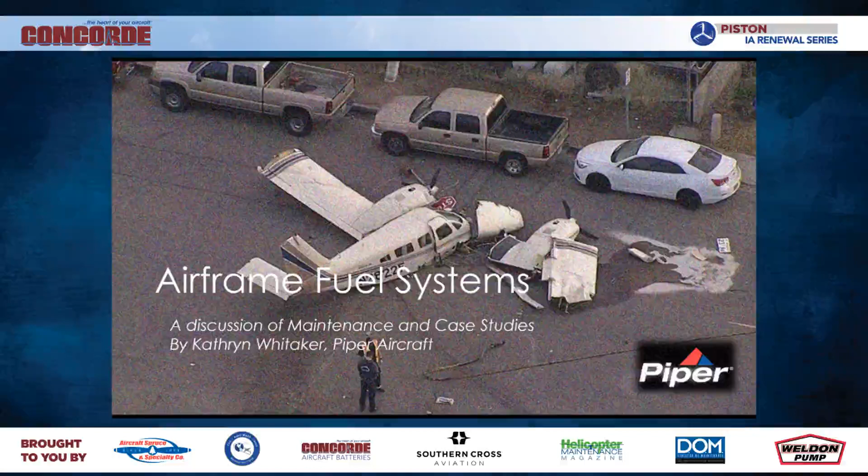So, if you don't remember me from last year, I am an aircraft accident investigator. My official title is Air Safety Investigator. And that basically means that I work for Piper Aircraft, assisting the NTSB in doing aircraft accident investigations, usually within the United States, but we also travel globally on occasion.

And today I would like to talk to you about aircraft fuel systems, which has been a recurring hot button issue within the accident investigation community for some time now. And recently there have been some accidents that have been more high profile lately involving these types of failures, aircraft mechanical failures. So I would like to talk to you a little bit about this, and I'm going to be referencing some case studies. I was told this was popular last year, so you'll be happy to hear that I'm going to be doing more of these today. So without further ado, let's get on into it.

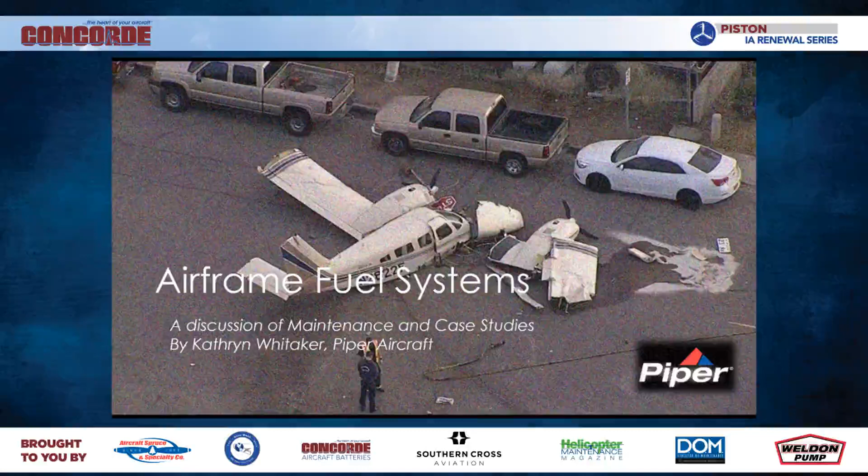So just to touch on some statistics from AOPA's Nall Report, in 2020 alone, which is the most recent year that they have done a more detailed publication of the information on, there were 153 general aviation or small aircraft accidents that were caused by mechanical problems, which was about 17% of overall accidents, and 26 of these maintenance-related accidents were problems with the fuel systems.

Another 58 accidents were related to fuel management, which usually relates to the pilot perhaps not bringing enough fuel on board, overdoing the endurance of their aircraft, maybe not switching tanks when they were supposed to.

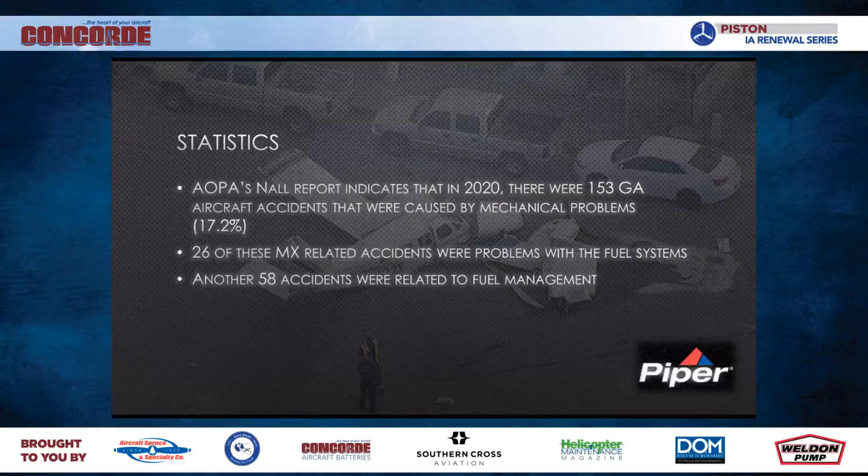Fuel system failures tend to fall under kind of 4 different categories. And some of these, or all of these, could be happening all at once within a failure. They include things like fuel flow interruption, loss of fuel where it's leaking, it's leaving the aircraft, contamination, where there's something in the fuel that does not belong, typically water or other things. We also can have fuel quantity indication errors, and we'll be talking about all 4 of these things today.

Each of these can result in engine power loss, and leakage can also cause fires. So we have many different hazards to flight when these things happen. These problems can occur together, or they can cause one another.

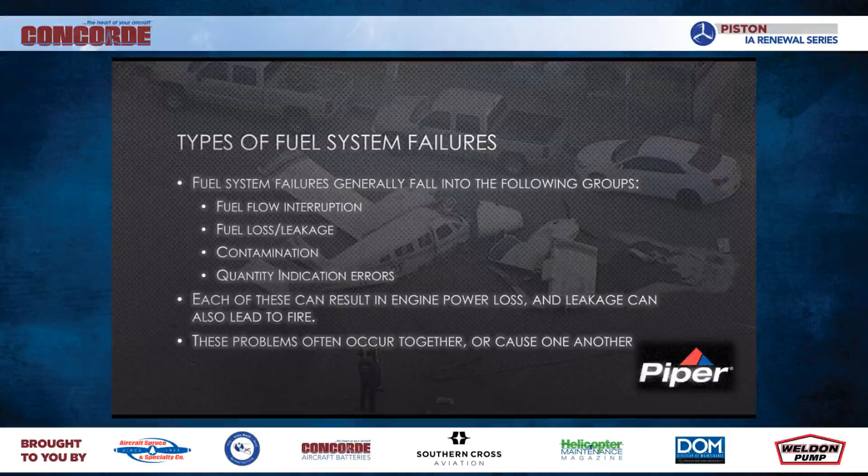So usually when you think of a fuel system failure, you're going to think of fuel starvation, which is lack of fuel getting to the engine or engines, fuel flow interruptions, things like that. And maintenance-related fuel flow interruptions can come from multiple sources. So you can have improper material usage. You can use the wrong sealant, sloshes. Fuel filters can be inappropriate. You can be installing the wrong gaskets in the fuel system.

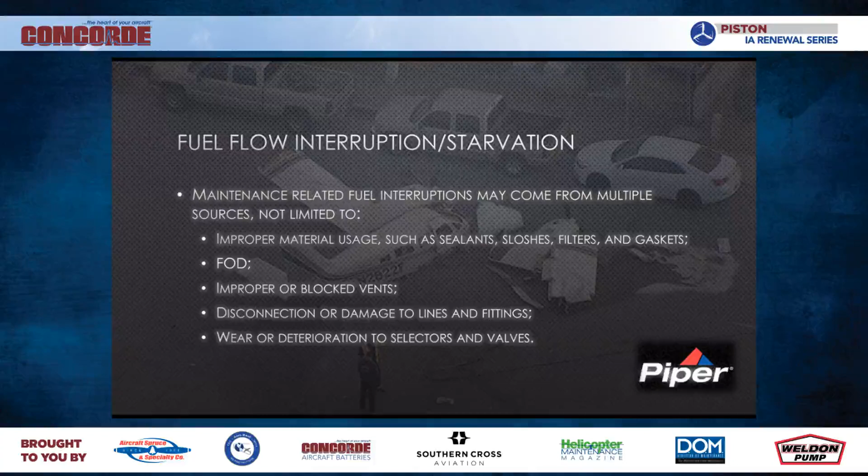You can have foreign objects, including things like water, that are entering the fuel system. The blockage of vents can cause interruption to fuel flow. Disconnection or damage to lines and fittings. And you can also have wear or deterioration of the selectors and valves. And all these things could be occurring on one aircraft if it's in kind of a troubled mechanical state. So be alert to these things.

We have a classic example right here. This was actually one of the very first accidents I ever investigated. This is a Cherokee 6. It had a mishap in 2018 in Reno, Nevada. And as you can see here, we've got a disconnected fuel line. This, I believe, was the fuel line that was going from the outlet of the mechanical fuel pump, the engine-driven fuel pump, to the fuel servo or the carburetor. I don't remember if it had a servo. It looks like a servo there.

This aircraft was undergoing maintenance at the time. This was somewhat of a frustrating case, and I'm sure many of you mechanics here will be very annoyed with this story that I'm about to tell you. But this aircraft was undergoing maintenance. Specifically, it was receiving a suite of engine data monitoring equipment, including a fuel flow sensor, feeding into an engine data monitor that was being installed on the instrument panel, which are great systems.

I honestly advocate for these to pilots more than any other instrument that you can get if you're flying VFR, especially. They do a great job of giving the pilot a much better understanding of what their airplane is doing, assuming that the mechanic is allowed to actually install this system correctly. In this case, the mechanic working on this aircraft was only partway through the installation of this system, and he was interrupted. He needed to get a torque wrench or some other type of wrench, and so he installed this fitting finger tight and left the engine cowling off.

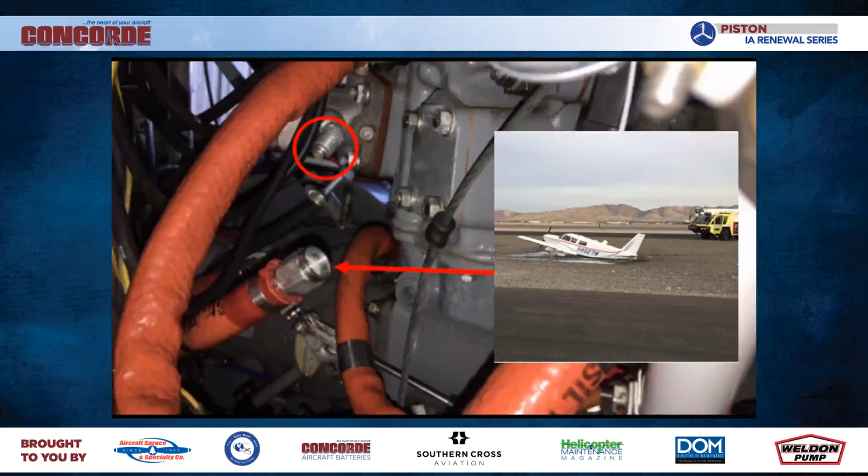Rolling on into another case study here, we have an accident that occurred about 9 years ago to a Van's RV-10, which is a pretty cool kit-built airplane, and the kit went out to its owner in 2009. And this dude hustled. He got this thing done in less than a year, and I'm told this is quite an intensive build for an aircraft. It usually takes more than a year. It usually is one of those things where it's like terminally in the process of being built. But this gentleman was able to chip away at it and complete this airplane in about a year.

During the initial climb on the day of the accident, the engine failed. The airplane was not able to return to the airport, and he performed a forced landing. He did not have many good opportunities to find a suitable landing site for this forced landing, and unfortunately he put it down in kind of like a paper mill yard with a bunch of equipment in it. He was fatally injured. One of his passengers survived, but he also had another fatally injured passenger.

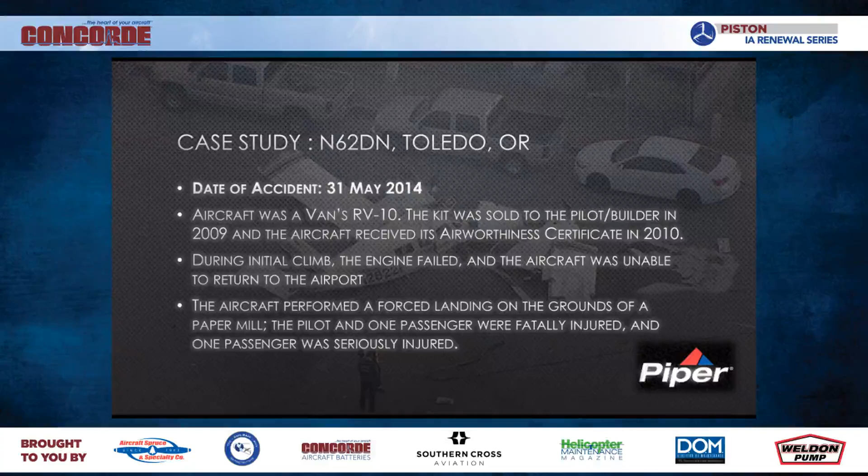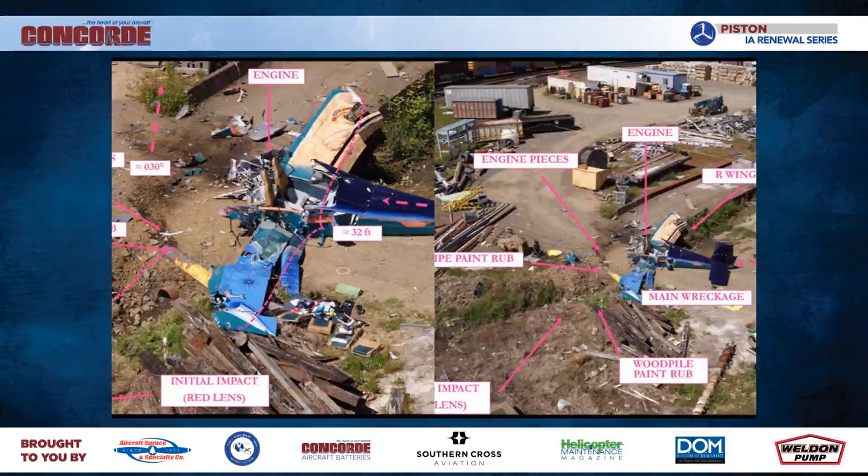So you can see here, the aircraft came to rest in this yard, and he really didn't have any opportunities to find a good, suitable landing site for it. It was very unfortunate. I was not a participant in this accident investigation, but when the NTSB investigator did the examination of this airplane, she found RTV lodged within the fuel system of this aircraft.

He'd put it on about 2 to 3 weeks before the accident, and a witness came forward later and said that he had seen the pilot/builder using RTV as a thread sealant and told them to cut it out. This is not an appropriate thread sealant. The build manual for the aircraft stated that fuel lube or an equivalent should be used on these threads. And I shouldn't need to tell anyone this, but RTV is not an equivalent to fuel lube. It should only be used when it is specifically called out for that purpose, and this is not one of those times.

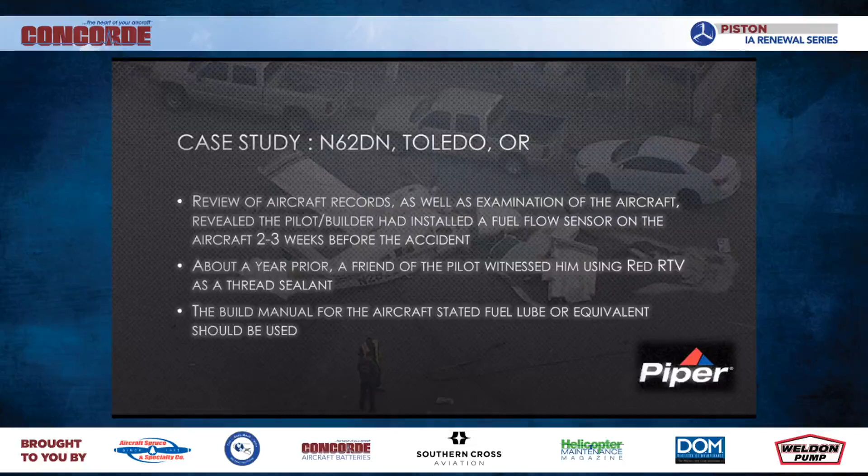So rolling on into another case study here. I didn't investigate this one, but it was really interesting. I kind of wish I'd been there for this one. So today we are talking about the Piper Aztec, which is a pretty cool airplane. I really like them. They are a somewhat larger twin-engine aircraft, really well prized for their useful load. They can carry about anything. They've got kind of a nickname that is probably too crude for this broadcast, so I won't say it, that talks about their load-carrying ability.

But this aircraft was being used as a training aircraft for pilots seeking to get ratings in multi-engine aircraft. And for about a week up until this accident, it had been having some issues. The pilots had said that on the left engine, when you had it selected to the left wing main fuel tank, it had multiple tanks in each wing, it would kind of run rough sometimes. It was really weird. It would run rough. Sometimes the engine would like stumble. Sometimes it would lose engine power and then come right back. It was presenting very odd kind of indications going into this.

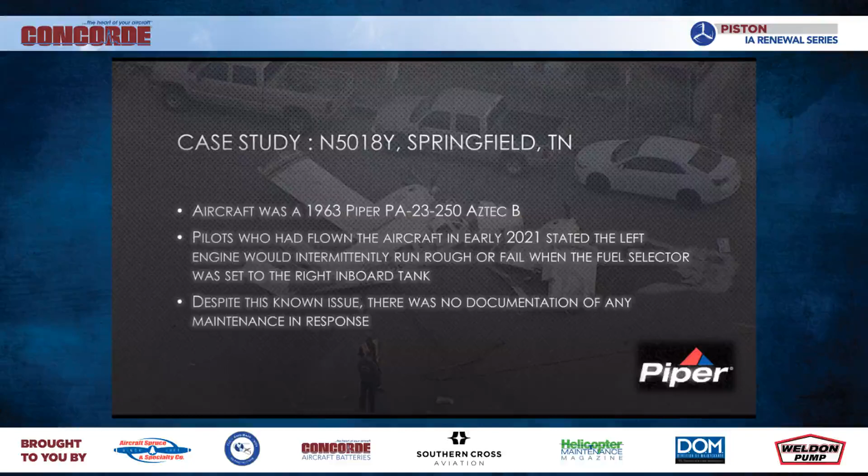It's not understood if they just didn't tell the maintenance group at their flight school about this, or if they were told and it just went over their heads. It's not really known, but there's no documentation in retrospect of any of this being addressed by maintenance, any inspection or repairs done to the airplane.

So on the date of the accident, this airplane was departing its home airport in Springfield, Tennessee, and it had a very sluggish takeoff roll. Immediately after it took off, the left engine failed completely and the propeller could not be feathered. They were unable to continue flight, and it crashed into trees beyond the runway. Both pilots were injured, but they were able to walk away from the aircraft.

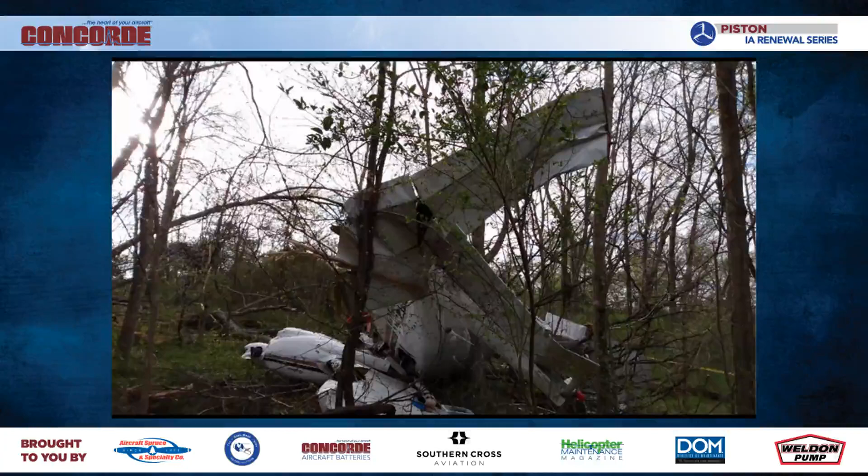They were very lucky to walk away from this aircraft. This thing was pretty trashed, very badly damaged. Both wings broke off, as you can see here. The cabin came to rest inverted, and they're very lucky the cabin didn't collapse and they didn't receive head injuries from landing inverted in this stand of trees here. Very, very lucky indeed.

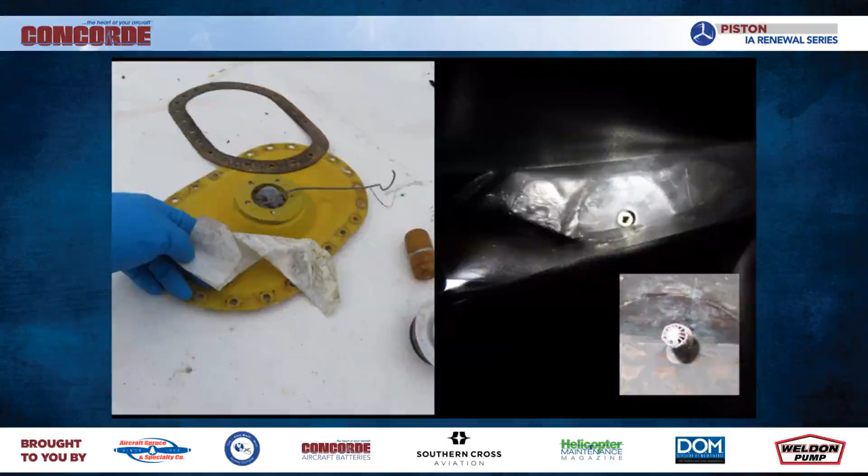So get this. This is what the investigators found in this left main fuel tank. In the picture to the left, we've got duct tape that was found floating within the fuel bladder of this aircraft. It looks like it had been there quite a while, because the fuel had eaten away the silver part of the duct tape and the adhesive. So it was this ribbon free floating within the fuel in this tank for quite some time.

Not only that, if you look to the picture on the right, that is the fuel outlet, where the fuel goes to the fuel lines, the pumps and the selectors, to go to the engine. And it was missing a fuel screen. The inset on the right shows what the fuel screen should look like. It's called a finger screen. It is there to prevent FOD in the tank from entering the line, and also give a larger surface area, so if something is trying to block that outlet, it takes more surface area to properly block it.

When the tank had last been installed, that finger screen did not get installed with it as it should have. Looking at the tank material, it actually looks pretty good. It looks supple. You don't have a lot of the dryness, the crackiness, the distress that you see on an older tank. So the tank itself was in good shape, but it was missing that fuel screen, and there was tape in it.

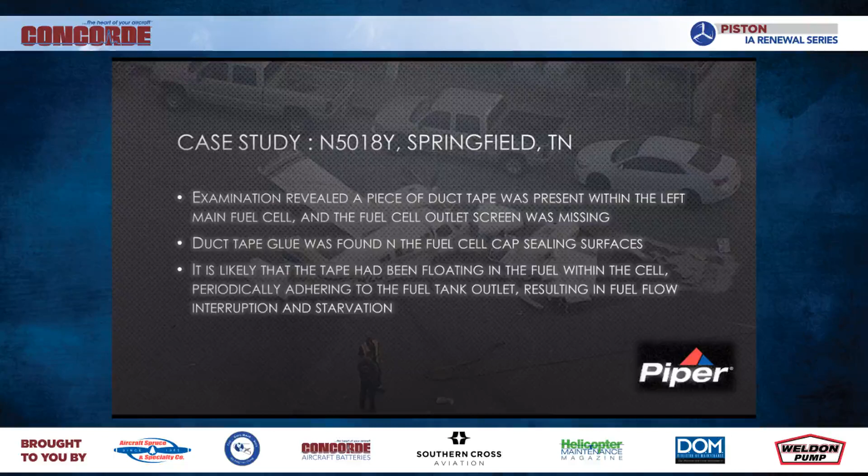Probable cause was considered to be the flight instructor's failure to abort the takeoff, because it did have a sluggish takeoff roll. He should have seen that there was a mechanical problem with the airplane and aborted the takeoff. But also causal was the inadequate maintenance of the left fuel cap by unknown maintenance personnel. They taped up the cap when they should have just replaced it or done whatever the maintenance manual says is appropriate, which resulted in a blockage of the fuel supply from the left wing tank.

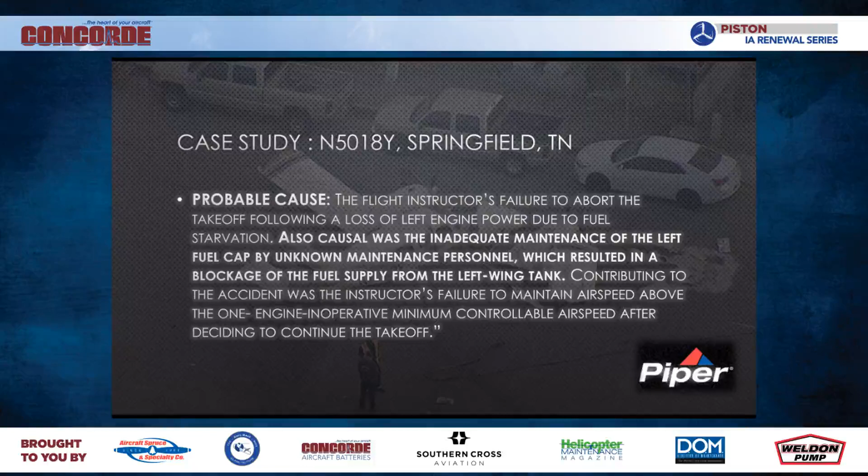Fuel flow interruptions can be caused by FOD, the tape, can be caused by wear or damage to fuel selectors or improper installation of components like that fuel screen. You should always look at the aircraft service or maintenance manual when performing maintenance. You've got to follow that. You can't be creative and come up with your own solutions for how to put things together, especially when they involve RTV and duct tape.

Nothing ever at any time should be fixed by duct tape on an airplane.

I mean, notwithstanding that airplane that got taped up after it got ripped up by bears in Alaska. If you haven't heard that one, Google it. You're sure to be entertained by it.

When inspecting fuel selectors, be alert to symptoms such as binding, roughness, or any changes to operation. I tell this to pilots very frequently, and it should be, in my opinion, a rule of thumb of any interaction with an airplane. If you are interacting with an airplane for a period of time, you become familiar with it, and the behavior of the airplane suddenly changes, that should always be a red flag.

Airplanes do not have moods. Either they are mechanically in good condition and they are doing as they are supposed to, or they are not. And any changes to their behavior or their operation should always be investigated.

Things should not change. So if you have an airplane that you have been maintaining or flying or interacting with on some basis, and suddenly it is doing something different than the last time you interacted with it, you should always look and see what is causing that difference. Could be something innocent like the pilot had another mechanic install something or change something on it, or it could be something bad happening.

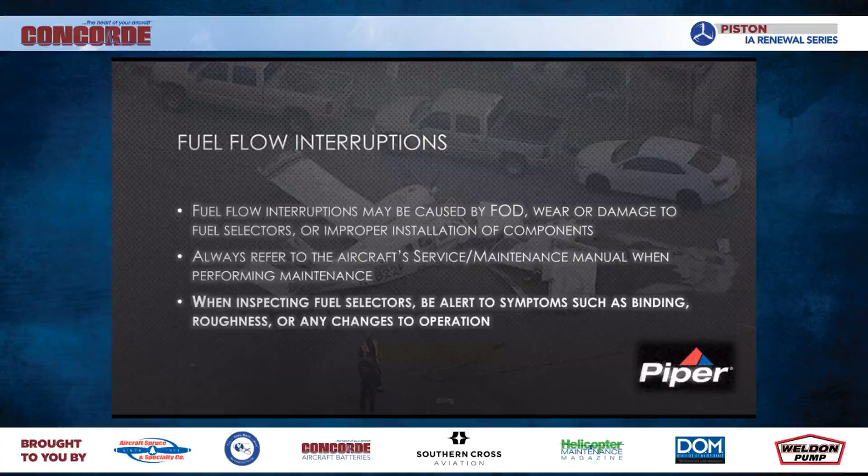But on this particular aircraft, the fuel selector was worn enough that it lacked a tactile detent, so that the pilot could not feel when he switched the fuel setting, if he was actually in the off or the left or the right tank selection.

So fuel selectors should always have a tactile detent, meaning that when you turn it to on, both, off, left, right, whatever selections this fuel tank selector has, you should feel a click or feel a detent. If they do not have that, that's probably meaning that the fuel selector has worn and is past its useful life.

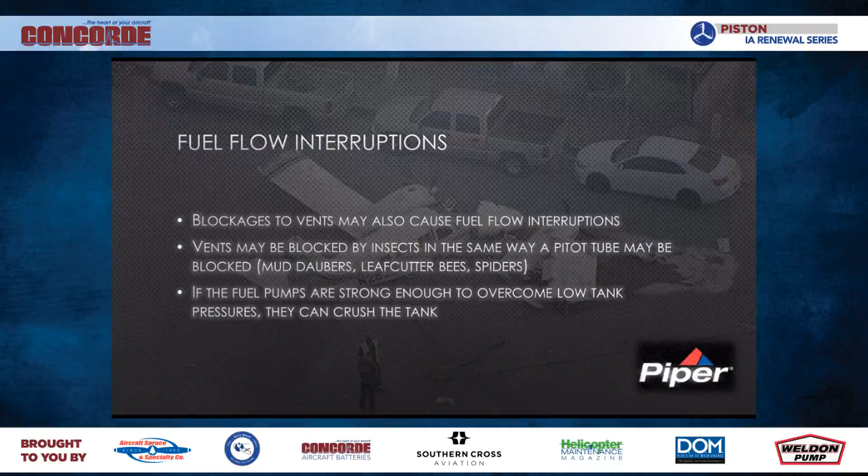If you wanted to visualize what I'm talking about here, if you take a bottle of water and you drink the water out of it without letting any air in, it's going to crunch down the water bottle. Tanks are not really meant to take a lot of positive or negative pressure, and by a lot I mean anything more than a PSI can probably start to do damage.

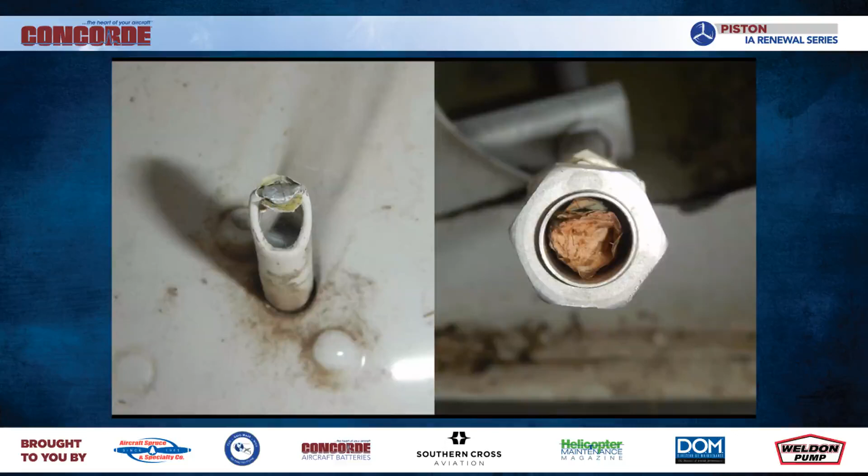We have vents here on a PA-28. This is one that I investigated a couple of years ago, and I don't believe was present at the time of the accident. This happened in the months that the airplane sat at a storage facility awaiting examination. But on the left, we have a tank vent that had a spider living in it.

Gross. And on the right, we have the fuel line that usually goes from the wing to attaching to the fuselage here, and a wasp or something stuffed this thing like 3 inches deep with leaves. So this can happen in a very short amount of time. Insect activity, they like to plug things up. I don't understand that obsession, but they will do it.

So much in the same way that a pitot tube can be blocked by insects, you could have vents or tubes exposed that are left open that can be blocked as well. And so be alert to that. I like to use clear plastic tubing to test fuel lines and vents for blockages. It's very cheap. You can get it at Ace Hardware.

I advise looking for the 3/8-inch diameter tubing because you can use it to blow air through these lines to see if they're blocked or not. They should be able to pass air through very easily. And if you have the fuel system open for any reason during maintenance, it's a good idea to get dust caps or cover the open ends that are exposed to the outside, because bugs will find them.

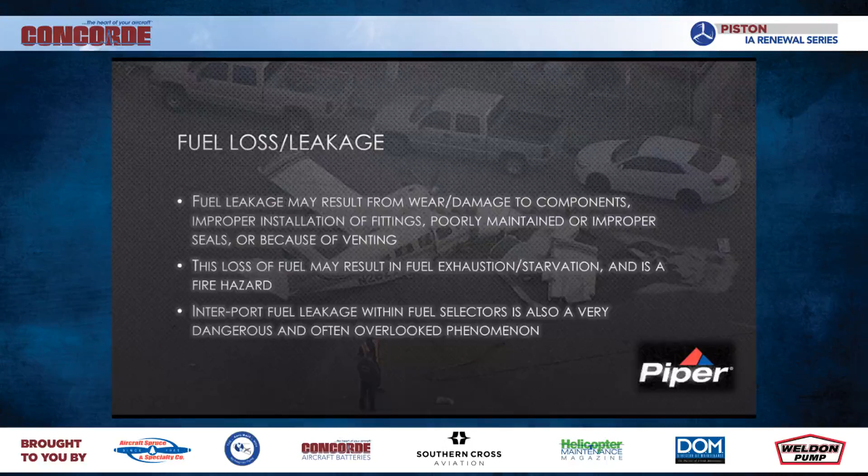We have here a Piper Chieftain that was on its takeoff roll. This is crazy. He was on his takeoff roll, and he started having engine issues. I think he noticed that he was having lower MAP on one engine than the right, so he aborted his takeoff, thankfully. And as he was slowing to a stop, his right wing exploded.

Turns out what had happened was he had a rubber fuel cell, much like the one that was seen in that Aztec, fuel bladder, whatever you want to call it, and it had gotten dry rotted, and there was a kind of a nipple that was a part of the fuel venting system that had broken off because it had just become so dry, very dry, very brittle. And so this started dribbling, leaking fuel and allowing vapors to enter the wing.

And meanwhile, we had a wingtip light wire that had been chafing on a wing rib, and it had been sparking. So you had kind of this nightmare scenario where you had leaking fuel that was trapped within the wing with these sparks that were potentially flying. And so this is the result right here. It's very fortunate that he aborted the takeoff and he just happened to have some kind of engine issue, and did not try to take flight with this, because I do not think that the result would have been very good at all, honestly.

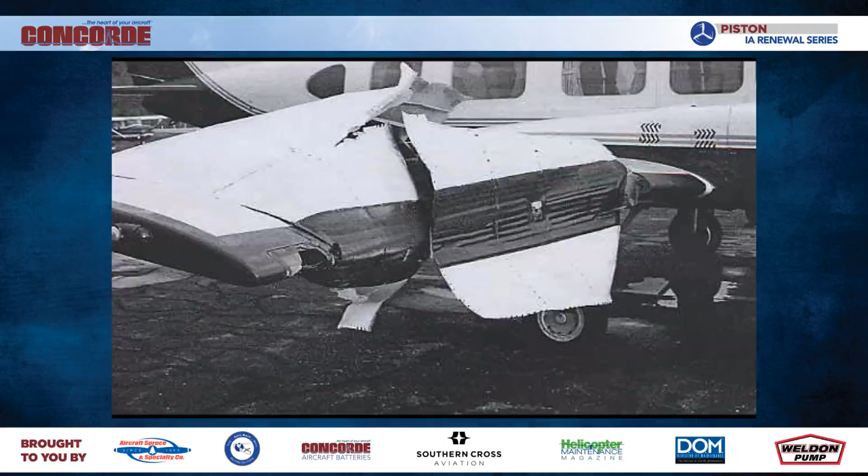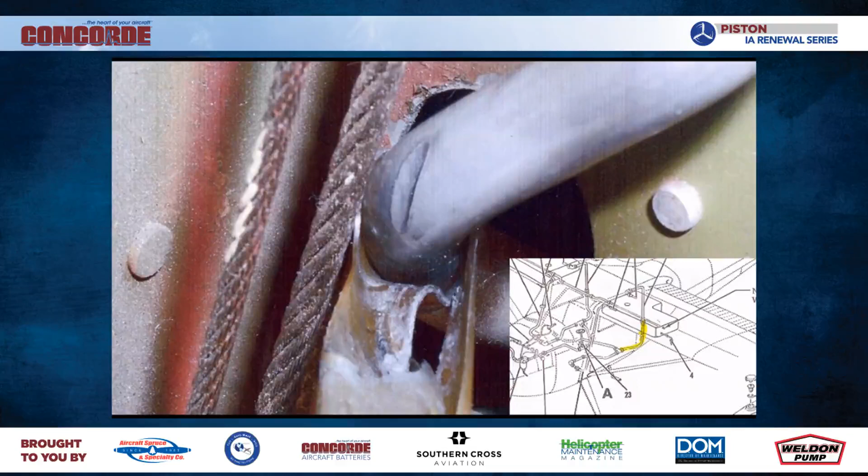Now, this gentleman who found this line here deserves some commendation, because this was in a very difficult area to see, kind of behind the door, the left cabin door of this Cessna 180. And we have two major issues here. We have an aileron cable that is wearing against something, and they really should not be touching anything other than fairleads or pulleys. We have this thing sawing, garroting into the fuel line coming from the left-hand fuel tank.

And this cable succeeded in getting, looks like, a good ways through the material of this fuel line here. And it would have been a disaster had this sawed all the way through, because you have all of that fuel, and I don't remember what the capacity of each tank is in the 180 Jag, but we have all of the weight and the pressure behind this, all of the fuel that is in the left-hand tank that is now bearing down on a hole that's in this line here.

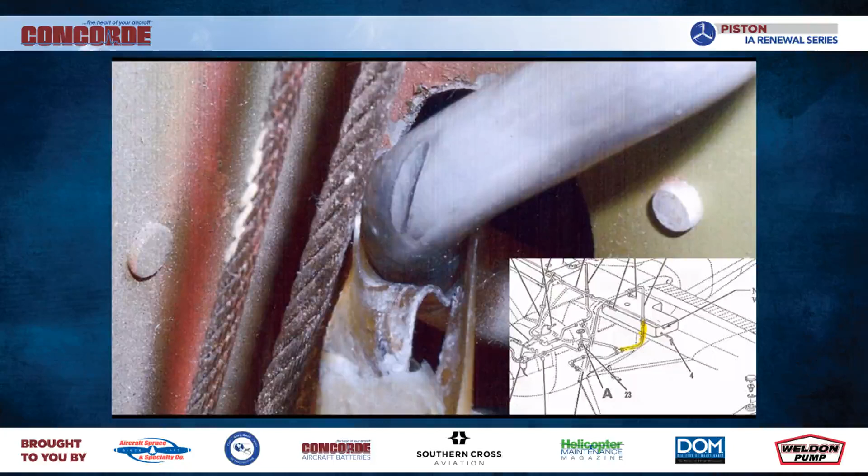So I imagine that had this airplane been in flight, it immediately would have been spraying just like a fire hose into the aft door post here. So it would have been an incredibly dire situation had this happened in flight. But this person did a very good job finding this and being able to photograph it. I guess he had to do some kind of razzle dazzle with a cell phone or a borescope to photograph this.

So this is a recent accident that I participated in the investigation of, and it is in the preliminary report stages of the investigation. So I cannot talk too much about it, other than to provide you what was stated in the preliminary report of this investigation. This was an aircraft. It was a twin Comanche that was flying in the Dallas area, north of Dallas.

This aircraft looked like it had been in very good repair for quite some time under the care of its pilot owner, and it looked like he was very willing to invest in the care of this aircraft. It was clean, it was tidy, it had very good maintenance records, and it was hangared. He babied the aircraft, he liked it very much, but he didn't fly it for a little bit, and he decided to take a kind of a $100 hamburger / buying fuel at another cheaper airport flight. And during that time, he had either a partial or total power loss to both engines. We are still determining that.

And when this aircraft was taken from the accident scene to a wreckage yard in the Dallas area, and we looked at it, I decided to at first sump the fuel from the two fuel selectors that are on the belly of the aircraft. On this type of aircraft, the only fuel sumps on it for each side are in the fuel selectors, which are in the belly of the aircraft. You don't have tank drains for each tank like many aircraft do.

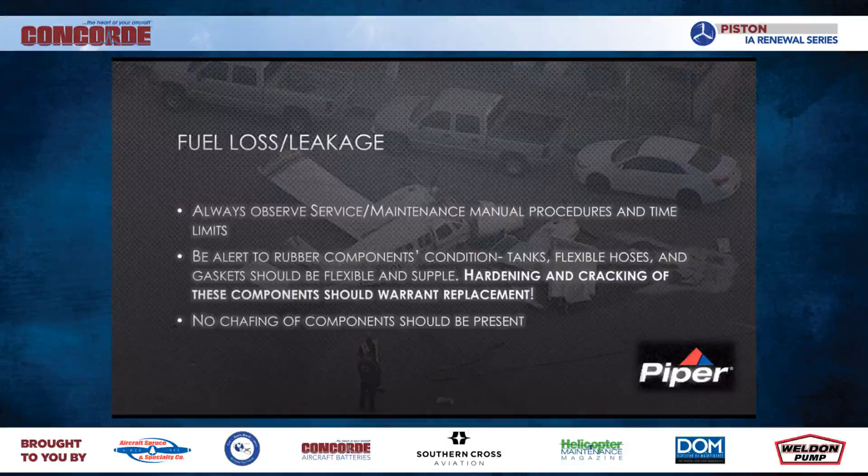Fuel contamination happens unfortunately very frequently, and usually the most frequent contaminant that you're going to see is water, like I mentioned in the slide with that Twin Comanche. Even hangared aircraft can have water enter their fuel systems through condensation. Fuel cap gaskets can deteriorate and allow in rain if the airplane gets rained on outside. And again, going back to our Aztec accident, taping up the gaskets with duct tape is not an appropriate way to remedy a fuel cap that is leaking.

Water can cause rust and another contaminant. So not only is water itself a contaminant, it breeds other contaminants. It never gets better, it only gets worse. And so you can also have other contaminants such as sealant, RTV that we mentioned earlier. You can have other FOD. You can have fuel tank sloshes or sealants.

Sloshes are specifically forbidden in a lot of different aircraft types. I don't believe any of the Piper products are allowed to have sloshes in their tanks. And for those who are unfamiliar with what sloshes are, it's where you can seal a tank by pouring in the sealant and then sloshing it around in the tank, and it covers up any defects that are on the interior of the tank. It sounds really sketchy to me.

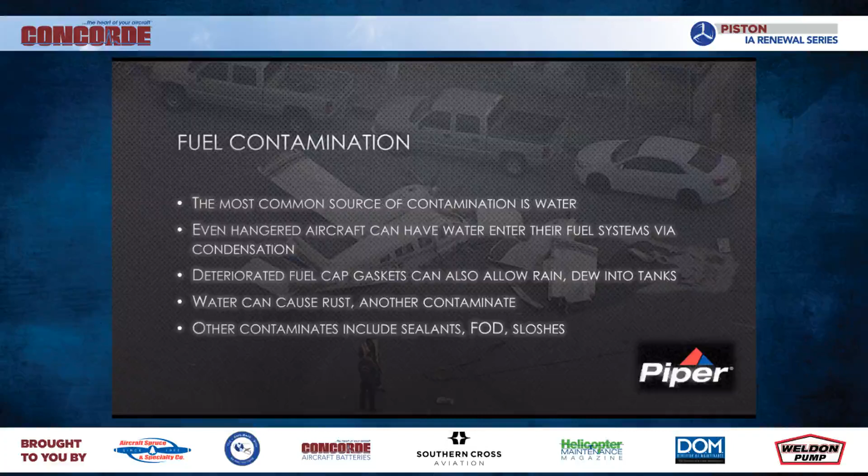Rust doesn't occur unless damage has occurred. So if you start seeing rust, you should be taking it beyond just a draining of the tanks and getting the water out. It should start being one of those things where you start really examining the fuel system in this aircraft, because you cannot trust rust. It means something bad is happening. It's never good. Never, ever good.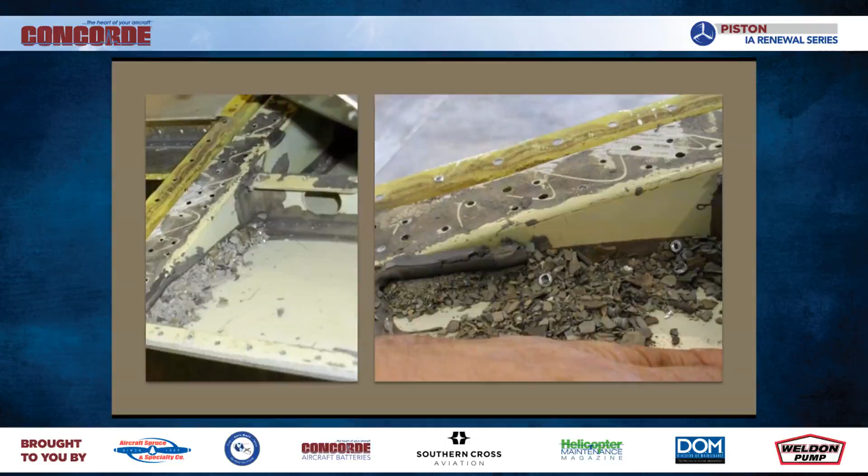I've in the field seen many fuel tanks and other places that were just chock full of bucktails and rivet heads that have been removed at some point and not vacuumed out, and they can be very problematic. So not only do we have this sealant that is flaking, cracking, breaking, we've got rivet heads here too, and I'm sure this person vacuumed them up, but this is visually a good example of how a lot of these little rivet heads and bucktails can enter fuel systems too.

This was another recent accident that, since it's a Cessna, I did not participate in the investigation of, but we have here a Cessna 150 that crashed on September the 6th, and it was a fatal accident that took actually a friend of a friend. One of my friends worked with this gentleman. He was a corporate pilot at the time, if I remember right. And that pilot's son was with him, and they both perished in this accident that happened shortly after takeoff. The engine failed. And if you were to review the preliminary report on the NTSB's website for this accident, you will see the following pictures, which is this hideousness.

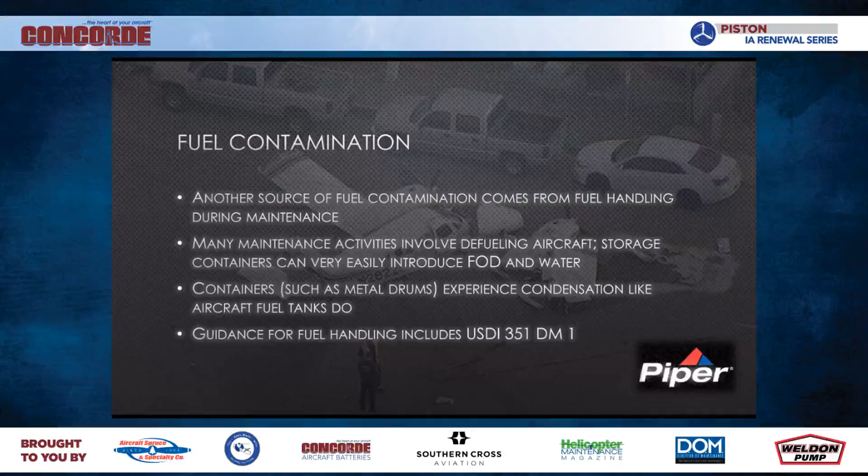Quantity indication errors. So this is kind of a big one. Although pilots are required to calculate the fuel consumption for every flight, inaccurate fuel gauges can cause accidents because pilots can see this fuel gauge showing an incorrect level and kind of doubt their own calculations that they made beforehand. They can cause misfueling as well.

They take on less fuel than they anticipated or more, which can cause weight and balance issues. So if you have gauges that are indicating less fuel than is actually on board, the weight of the aircraft and the balance of the aircraft can be different than the pilot had calculated.

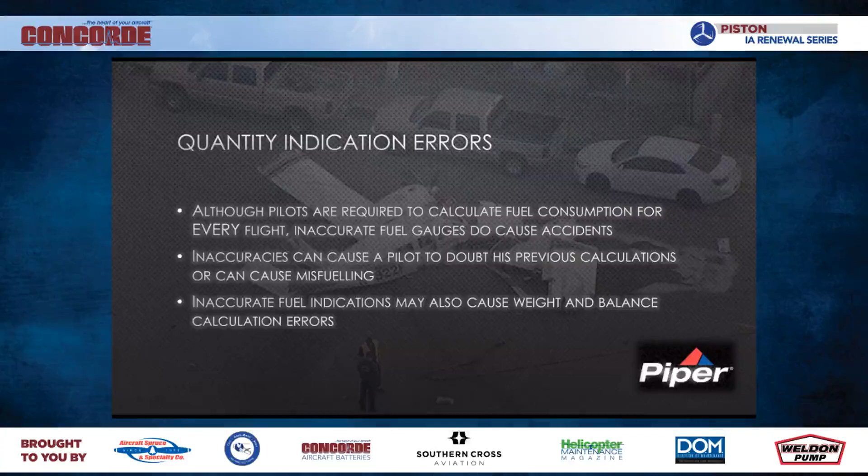So we are going to go on to the centerpiece of this presentation, which is the background image that you see here, N2822F, which was a 1979 Piper Seneca II. The day before the accident, the pilot had fueled the aircraft up at Glendale Airport in the Phoenix area, and he had used the airplane's fuel gauges on the panel to determine the fuel level of the aircraft when he was fueling it.

So he was fueling the aircraft, and then he was looking at the fuel gauges on the instrument panel to determine how much fuel he had, because he didn't want to top the tanks. He wanted partial fuel for his activities in the following days. And the Seneca is kind of a weird airplane. It has multiple tanks in each wing, but you only have one filler.

So you have to dip the tanks, or on some of them, they have a little gauge that will say what the inboard tanks have in them. But it's kind of tricky to figure out visually what your fuel level is on these, which is not too rare in the aircraft world, unfortunately. But he fueled the aircraft, and when he looked at the gauges, he believed he had 40 gallons of fuel per side, so 40 in each wing, 80 total.

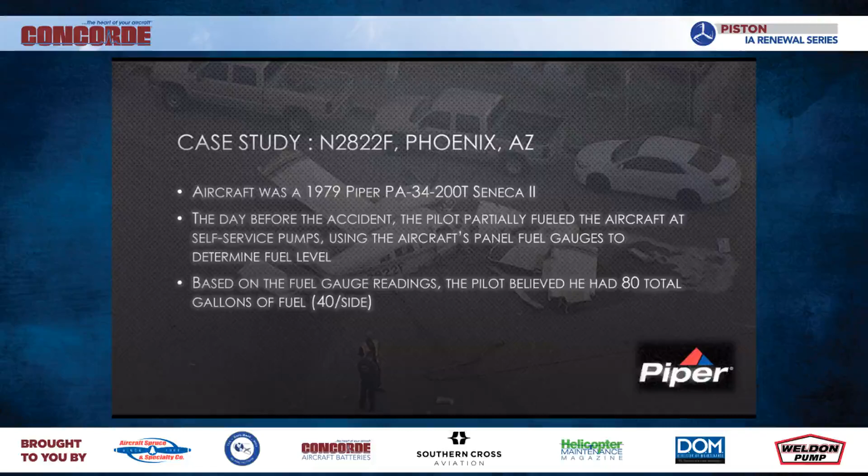So, as I'd said before, this airplane has two fuel tanks in each wing, but you also have an option for a third, and this is what the airplane had. It had three fuel tanks in each wing. The outboard tanks feed into the inboard tanks in each wing, so only the inboard tanks supply the fuel to the engines, and only the outboard tanks have a fuel cap, basically.

And each of the main tanks has a fuel sensor in it, and they're kind of wired in series. So you only have one gauge per wing. So in effect, although you might have multiple tanks in each wing, they kind of act like one tank functionally. You can only select one side, and you only have one gauge, so it's in effect just one tank, I guess you would say.

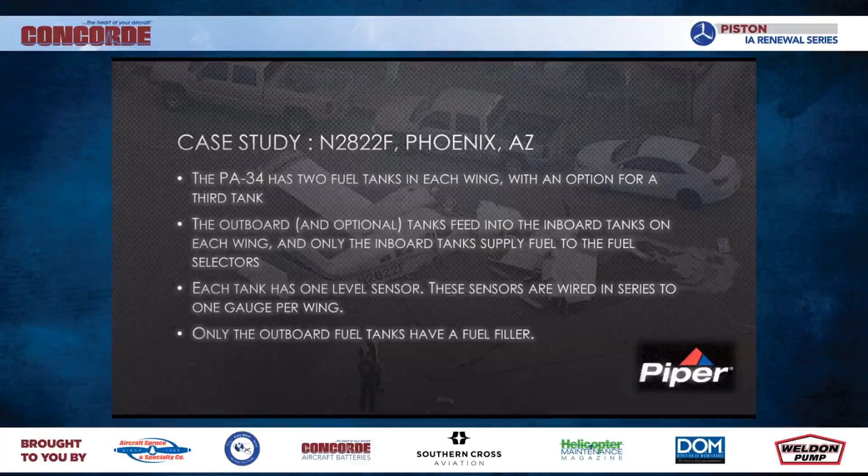And this is the diagram out of the POH of the airplane. So as you can see here, functionally you only have one tank per wing, although physically there's multiple tanks. It's confusing. I'm not explaining this very well.

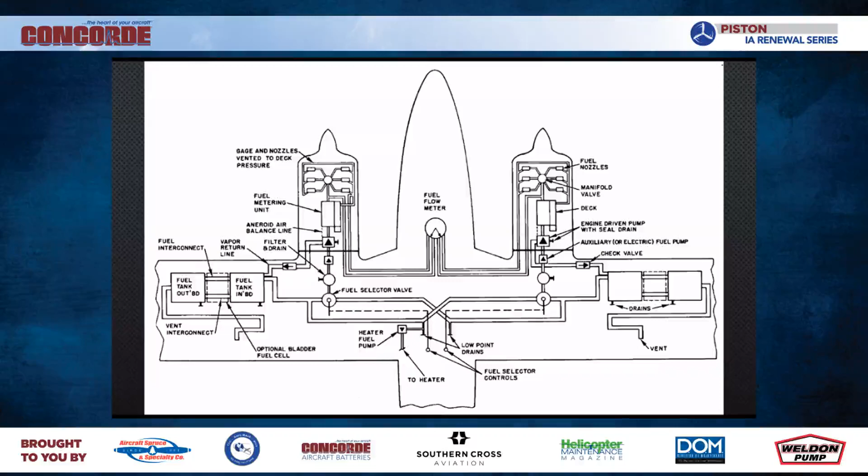So on the day of the accident, the aircraft had done some cross-country activities throughout the state of Arizona. On the morning of the accident, he boarded a passenger in, I believe it was either Payson or Sedona, Arizona, and decided to fly into Deer Valley Airport. And en route, he noticed that there was a fuel imbalance.

So one side of the aircraft was indicating more fuel than the other, and so he decided to cross-feed from the fuller side and balance out that fuel without maybe wondering why he had a fuel imbalance in the first place. But when he was on final to Deer Valley, he noticed that both of his engines had failed.

Let's see if this works.

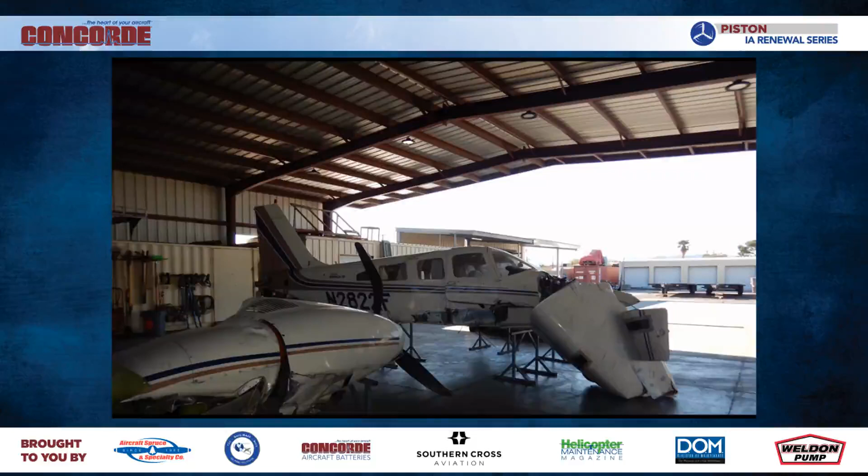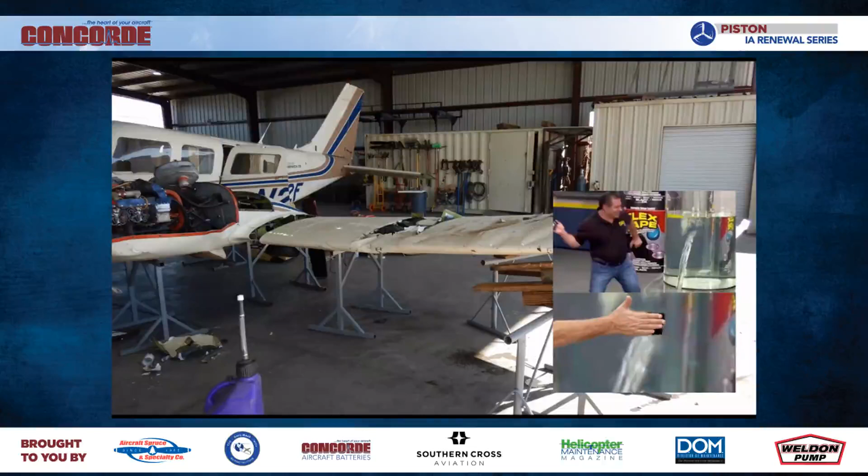And so to troubleshoot, at this point, based on what the pilot statements were, we kind of had some inkling that we had a problem with the fuel level indication of what this airplane was telling it had on board for fuel. And so we wanted to test the fuel system of the airplane, but as you can see, the right wing had been destroyed on this aircraft, and the left wing was in pretty bad shape and had been cut off during recovery.

And so what we did was we leveled the wing to try and make it as close to what the airplane would be as it stood on the ramp, and used flex tape and basically taped up the fuel tanks so that they would be able to hold liquid again. And we put those fuel level sensors back and applied power to the aircraft. It's actually battery power. If you turn the battery master on and you had a battery available, the instrument panel would light up.

And so we followed the maintenance manual instructions for how to test the fuel level sensors on board the airplane, and we filled these fuel tanks that were flex taped up in 5-gallon increments, if I can remember correctly, and were able to test the fuel level sensors and the fuel gauges for this airplane in this way.

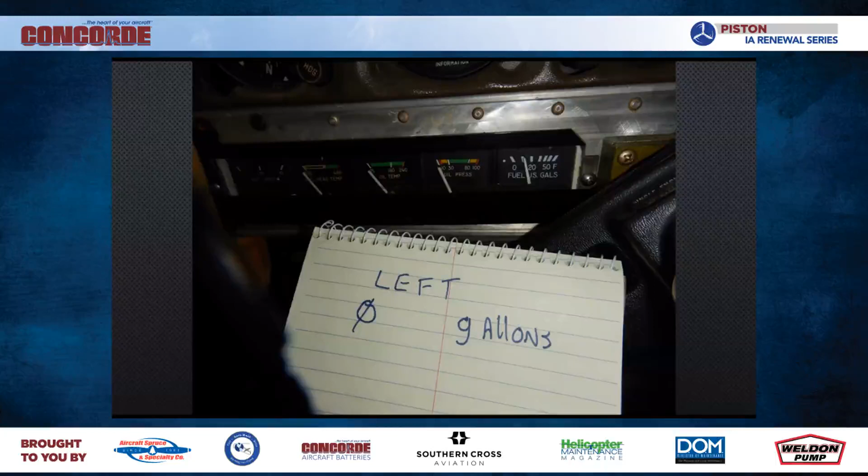The left wing fuel sender units and the fuel gauges indicated the fuel levels significantly higher than what was present in the fuel tanks. And although the indication discrepancy of the right wing fuel sender units was greater for fuel levels in the tank above 30 gallons, the indication was mostly accurate. So we swapped the right-hand fuel level sensors into the left wing too, and tested those. They were not super accurate, but they were, I guess, closer than the ones on the left.

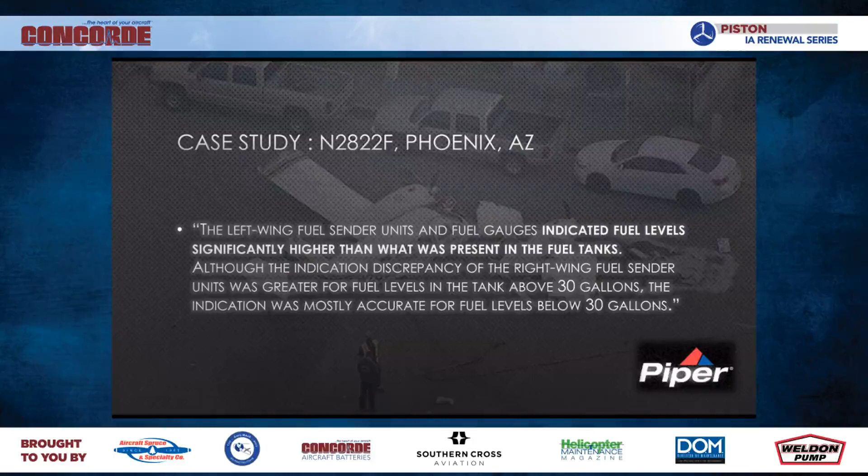And so we had some pretty significant differences on what the actual level was in the tanks versus what the indicators were saying. And so basically what we ended up finding out happened was that this pilot had fueled the tanks. He looked at the fuel gauges on the dash, which were inaccurate, and he fueled the airplane with probably a lot less fuel than he anticipated the airplane would need for these activities. He believed he had 80 gallons. He probably had much less than 80 gallons on the airplane.

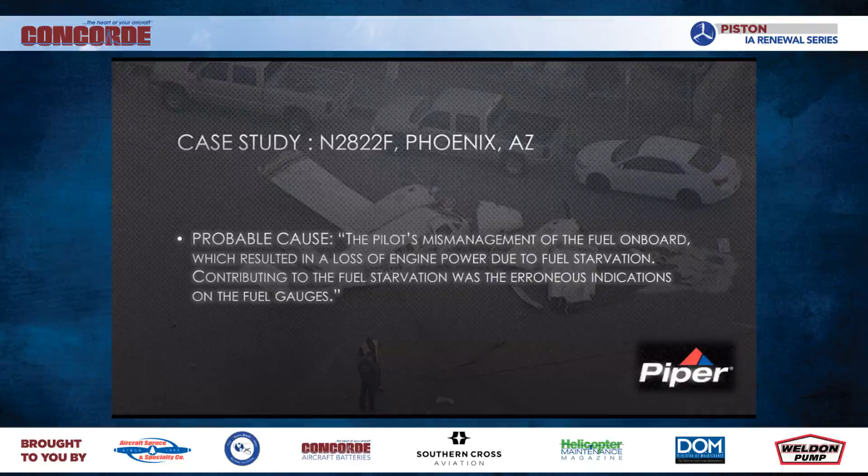And so when he went to basically cross feed the right engine from the left tank, which he believed had much more fuel than it had, there was no fuel in it. And so both of his engines failed, and he was unable to make the airport. So the probable cause was the pilot's mismanagement of the fuel on board, which resulted in a loss of engine power, and contributing to the fuel starvation was the erroneous indication on the fuel gauges.

So I know a lot of our checklists don't say that you need to ops check the fuel level sensors on board an airplane, but it really should be something that you should consider bringing up with your pilots or the operator of the aircraft, to maybe take the time to look at those procedures, bring that airplane into the hangar, defuel it, do whatever the maintenance manual says to check the accuracy of the fuel level sensors.

I'll also point out that there are digital fuel level sensors on the market that so far seem to be much more accurate and more reliable than the old school ones of the 70s and the 80s. And so food for thought. Consider recommending those. I do believe a lot of them require a special power wire to be installed for them to work, but it's really good to have fuel gauges that are actually working, believe it or not. And this last accident is definitely a case study of that.

In conclusion, always be familiar with the aircraft's airworthiness directives, service bulletins, letters, instructions, service manual or maintenance manual procedures. Any changes to the aircraft's performance or feel should be investigated. If it starts doing things differently than it always has, it's really time to follow up, especially when it comes to the feel of the fuel selectors. If you feel grinding or there's a lack of detent all of a sudden, it should be time to investigate further. And fuel leakage should always be investigated because you are losing fuel that the engine absolutely must have on board to be operating.